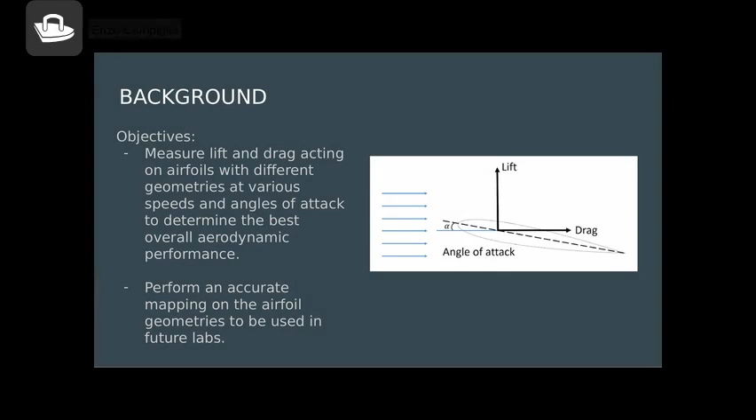I'd like to start this presentation by giving a quick background of our project. So, the main objectives of this project were to select different airfoils with different geometries and measure lift and drag acting on them at varying speeds and angles of attack in order to determine the best overall aerodynamic performance. And the second part of this project included performing an accurate mapping on each airfoil selected to potentially be used in future labs at Clarkson.

The significance of this project is to increase lift and to reduce drag. Doing so would result in a better efficiency of the airfoil. The question in this project was, what is the best airfoil geometry that will give us the best lift to drag ratio and the best CL over alpha curve?

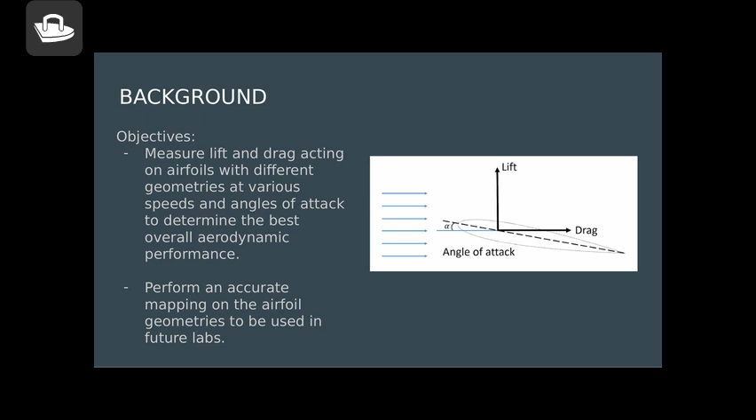The experimental plan for this project involved testing three different airfoils at both low speeds between 2 to 4 Hz and high speeds 5 to 6 Hz at varying angles of attack ranging from -2 degrees to 14 degrees, changing the angle of attack in increments of 2 degrees. This process was repeated for both lift and drag measurements for all airfoils.

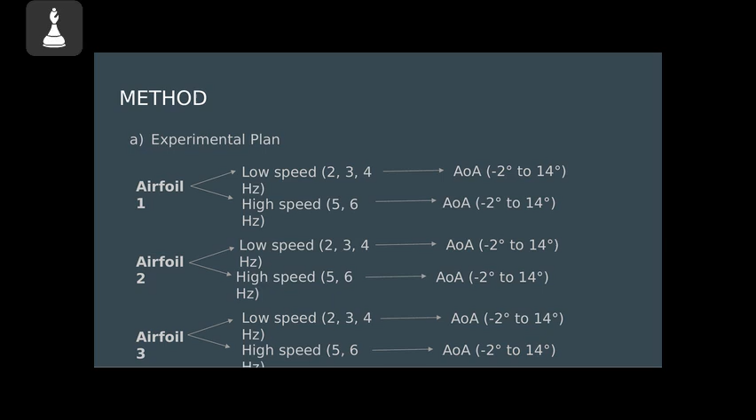The procedure for the aerodynamic performance of the airfoils involves first calibrating both the lift and drag ports of the wind tunnel using a combination of pulleys and weights which were measured prior to starting. We then properly wire the outputs for the drag sensors to the computer using the channel board and the force sensors attached to the wind tunnel.

We then record the pressure inside the wind tunnel at zero velocity, and record the pressure inside the wind tunnel at experimental velocities of 2 Hz, 3 Hz, 4 Hz, 5 Hz, and 6 Hz. We use these results later to determine the true wind speed. Next, we calibrate the input ports using LabVIEW and adjusting the sensitivity on the channel board using a flathead screwdriver. We want the number to be as close to zero at the starting point.

At this point, we then record the data for drag at the multiple speeds and angles of attack. After all data is collected for the drag, we then repeat this process, but we wire everything for lift instead of drag.

The procedure for geometry mapping was performed after the aerodynamic testing and involved going to the makerspace and using Peel 3D to scan the airfoils to make a rendered image. We then import that image into Fusion 360. There, we correct the geometry, and then once the geometry is corrected, we save the STL files, import those coordinates into MATLAB, where we then plot the coordinates to create the airfoil shape and determine equations to describe that shape.

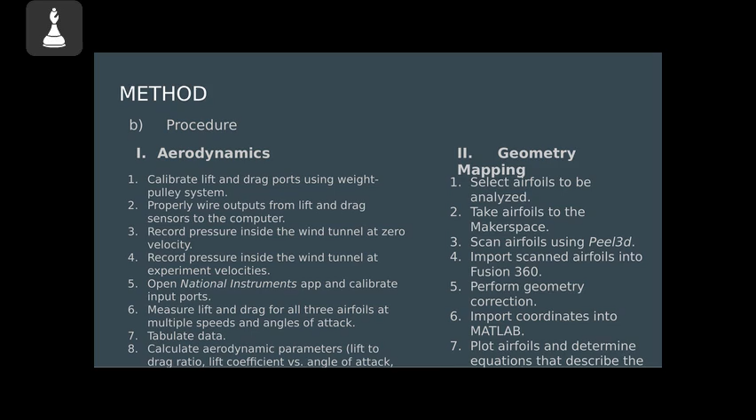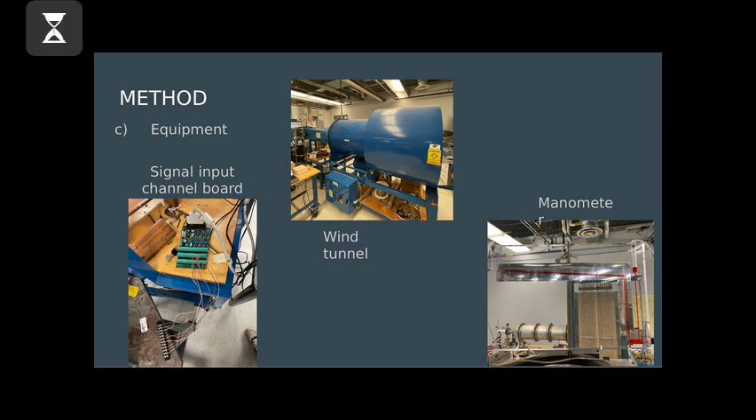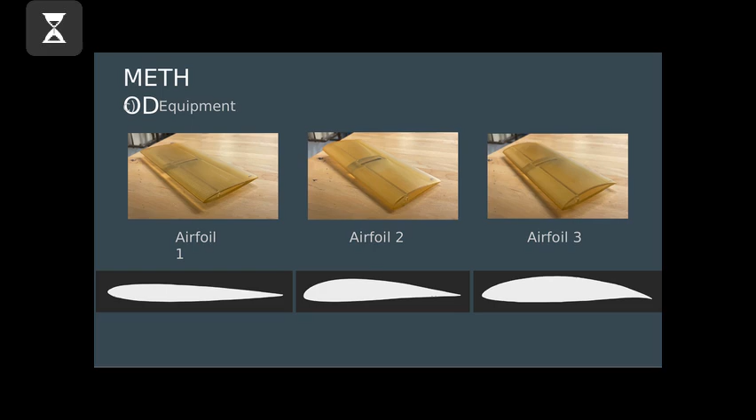The equipment used for this project was a signal input channel board, which was wired in a Wheatstone bridge, a wind tunnel, which allowed us to change the wind speed and the angle of attack, and a manometer, which allowed us to read the pressure in inches of water of the air. These are images of the three different airfoils that we used for our tests and their cross sections that we got from our scans.

For safety risk assessment, we identified the risks of using the wind tunnel. Potential hazards are the rotating fan blades, the high air speeds, the high voltage components, and loud noises generated from the wind tunnel. Another risk is if the airfoil broke or a part broke in the wind tunnel, which would then get lodged into the blades, damaging the wind tunnel. To mitigate our risks, we used safety glasses at all times and used ear protection. We also debriefed with Professor Hoover before using the wind tunnel on how to use it.

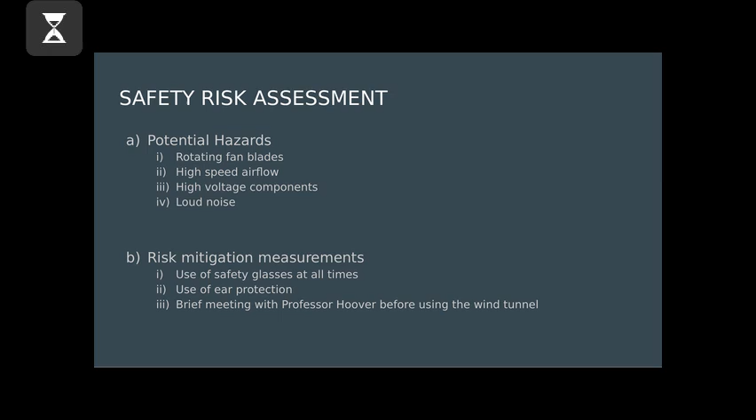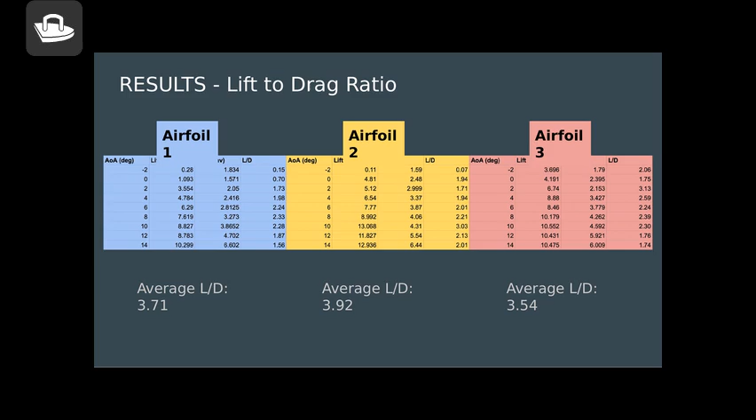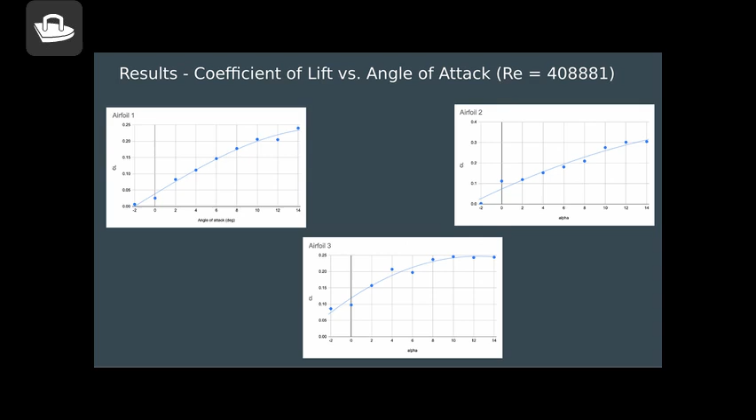Moving into our results for the lift coefficient versus the angle of attack, these plots are for a Reynolds number of a little over 400,000. And based on these plots, it was determined that airfoil 2 has the best overall curve because it shows the greater CL max value of a little over 0.3.

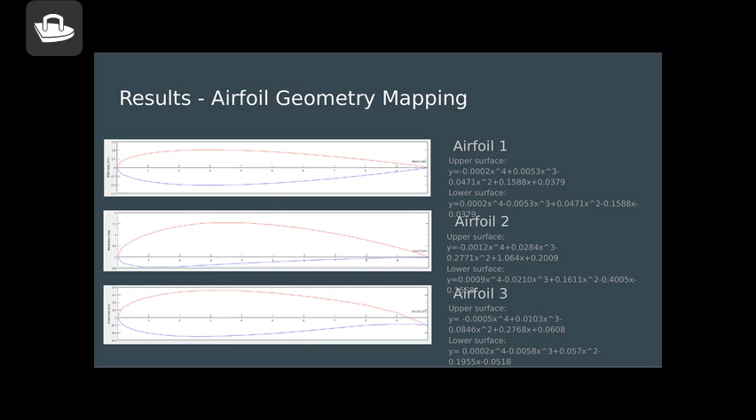Going into the results for the second part of this project, which was the airfoil geometry mapping, we performed mapping on all the airfoils analyzed in this project. These airfoils were plotted using MATLAB, as you can see on the left, and then on the right, you can see the upper and lower surface equations for all the airfoils.